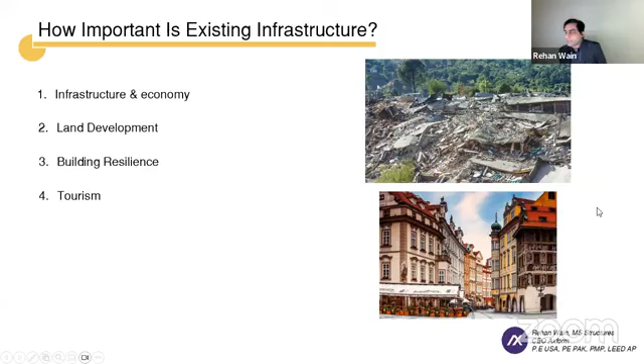What you can see is that we are living in very densely populated urban cities with all sorts of constructions. Some of them are code compliant, some are not. They're brick masonry, brick infill masonry structures, and there are some few minor cases of steel construction as well.

But we have a lot of buildings on our hand, and the best way to preserve our greenland is that we can repurpose and reuse, making sure we keep using the area that has already expanded instead of going more into greenfield. As you can see, the greenfield is decreasing every time. This is actually the top part of the city, but what has happened on the southern side is even much worse than this.

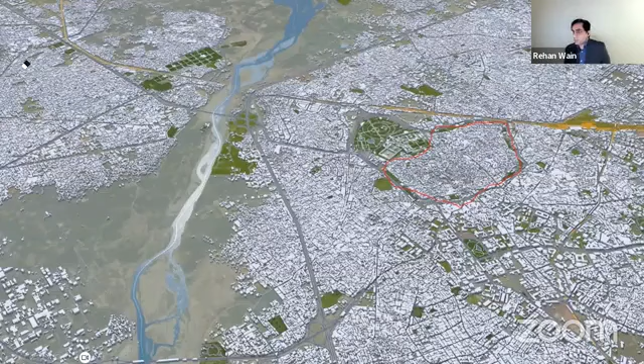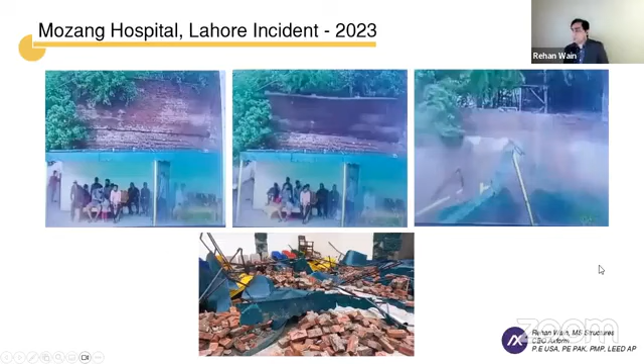I'd like to show you the next slide. If I can run this video.

Rehan, yes, please excuse me for a second. Yes, sure. I would like to welcome our new participant, Mr. Jovin Manyori, from Tanzania, East Africa. He has joined us for the first time. Thank you very much. And we have been joined by Mr. Zhang Jianling, a Chinese national. Thank you very much. Both are civil engineers. Thank you for your time and coming to this lecture. Thank you very much. Rehan, you can continue.

I'll go back to the incident we were talking about from the Mozang Hospital, where there was an out-of-plane failure of the brick wall over the waiting area. I'll try to play this video from YouTube, and you'll see what actually happened. I'll just pause here right now. You see people sitting here, you see this brick wall, and you'll see what happens. Let's see.

What you just saw is a very basic thing. It's unfortunate - it's not a mega structure, not a 3, 4, or 10-story building that needed to be analyzed. These kinds of failures could happen anywhere, and the basic problem behind this is that we sometimes do not have a refined understanding of how different members behave under different kinds of loads. This was an incident I wanted to show for the out-of-plane failure of brick walls.

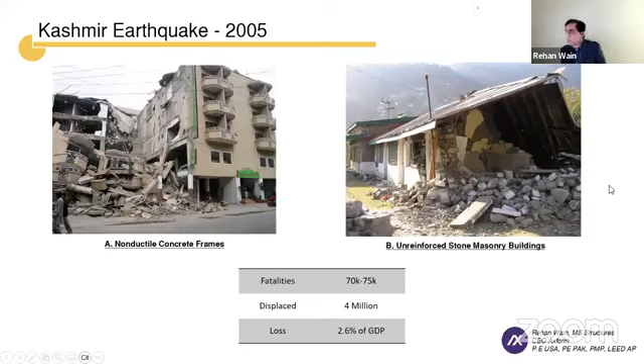So going on to the next slide, it shows images of what happens in non-ductile concrete frames. We know the philosophy of earthquake design for lateral force resisting systems is that we want our joints and columns to be ductile enough. We want hinges to form inside the beam, not in the column or the joints. We never want the joints to open up or fail, or the columns to behave as gravity columns, swaying like that. The hinge should form in the beams.

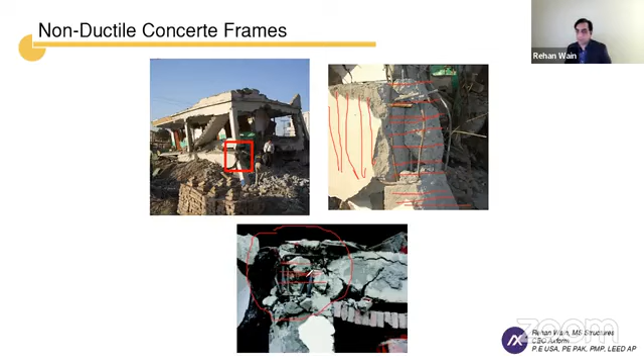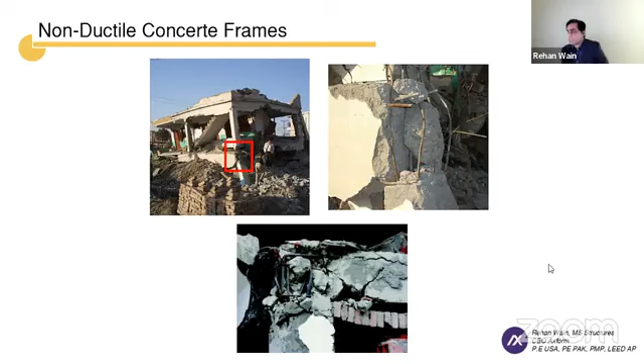What happens in soft story is that we have the ground floor, which is open because of retail or parking, but we have apartment buildings on top where there's not just the concrete frame but infill brick or something stiff enough bracing the frames. So you're introducing a weak region in the ground area - your entire energy dissipation happens there at the ground, but that's not what you wanted in your analysis. Unfortunately, the entire energy dissipation takes place at the ground floor. This is another case of non-ductile concrete frame failure.

So there was some kind of issue - I'm not exactly sure, but this story could have been soft compared to the stories above, or it had some torsion irregularity, or there was some strength reduction at this level. That's why the codes imply that you cannot have a sudden drop of strength or stiffness in adjacent stories, because it wants the structure to behave as one, and it does not want a majority of the energy dissipation happening in only certain stories.

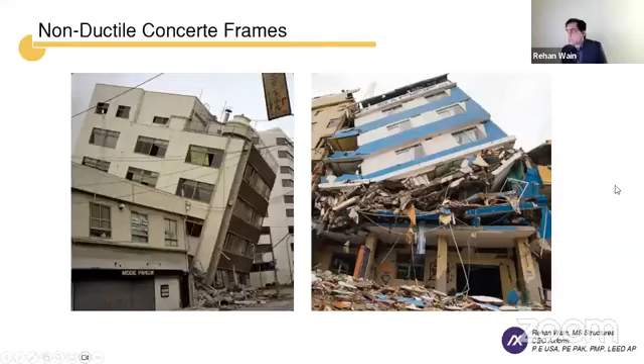So these were more examples of non-ductile concrete frame. Now we'll go on to the next slide, which explains the formation of plastic hinges in concrete frames.

We know that the basic function of a concrete moment frame is to provide stiffness through its beam-column joint. So if I draw a beam - sorry for the rough sketch - and this is your column, the majority of your stiffness needs to come from your joint. Your joint needs to be really stiff, right?

But what happens in case of hinge formation in the first case is your hinge forms either at the joint or inside the column, but it does not form in the beam. If I highlight this in blue as your beam, the hinge should have formed here in this region, inside the beam. But what's happening here is your hinges are occurring on your column.

So once the hinges are inside the column, there's a very rapid degradation of the story stiffness. And now you have a high second order effect as well.

What a high second order effect means is you have your story shear like this, your gravity loads were here like this. Now you have this huge displacement from your equilibrium position - you have this delta introduced here. And because you had a hinge form at the column, your entire structure is swaying too much, more than what you anticipated in your analysis.

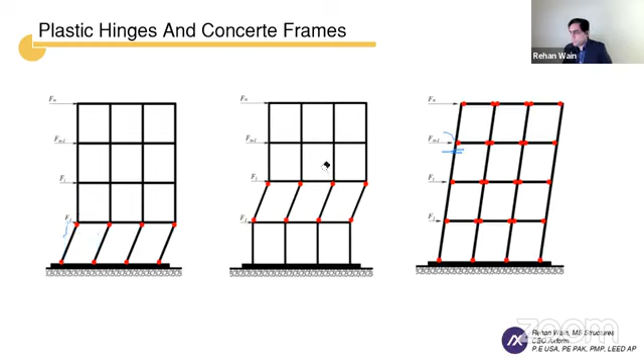So we talked about non-ductile concrete frames and plastic hinges in pretty good detail. Now let's talk about what happens in case of brick or stone masonry. This kind of construction is something you would typically not find in IBC or American codes, because the developed part of the world has transitioned away from the use of bricks or stones as partition walls or as bearing structures, especially in new buildings.

So a lot of the literature I found on how to resolve this is coming either from inside Pakistan or from our neighbors, India. The problem with stone or brick masonry is different - we don't have the same problems as in non-ductile concrete frames. It's a different animal, a different issue. For example, there was a wall here before - what happened is there was an out-of-plane seismic motion, into or out of the paper.

So what happened is the stone here just fell off. It's because the wall does not have the minimum capacity for out-of-plane action, and most of its shear strength is in the plane, in the direction of the wall.

Another issue is that we have these tall walls not braced along the height, and in fact, they're not even restrained at the top by a positive connection. Typically, you will see just a light gauge metal sheet placed on top with some wooden purlins or something like that.

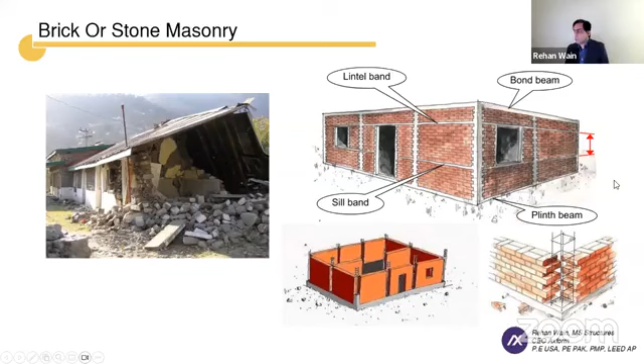ASCE 41 actually also has a ratio for the aspect ratio, shown here on the right. You cannot have a tall wall with small width - this wall would be the favorite for an earthquake to just topple off. So they want to limit your aspect ratio by introducing these sill beams or bond beams with columns around them for confinement. This is the solution for brick or stone masonry in regions with high hazard of out-of-plane failures.

Another very interesting thing I've found from the EERI paper is the Dhajji Dewari, if I'm pronouncing it right - a genius solution developed in the Kashmir Valley. You will not find this in the codes, but it's how they were able to resolve the out-of-plane failures in some regions where they have these wood-laced structures.

What they're doing is introducing wooden members to break the aspect ratio, breaking the entire wall into small panels. This also increases - it's doing the same function - confining the stones against out-of-plane failures.

The EERI paper came out in December 2005, the first one from them after the Kashmir earthquake, and it reported minimum casualties associated with this kind of structure. Although it wasn't explicitly designed, it's surprising how well it performed based on the solution the people of that region had learned over time.

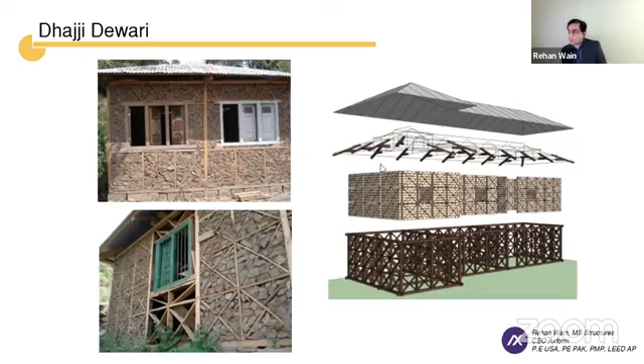I've seen a lot of testing for this structure. I found that it was tested later on in IITs and also in UET Peshawar by, I think, Dr. Qaisar Ali. What they found is that this structure has indeed shown much better performance in the labs as well, especially if you nail the wood together - instead of just placing it, connecting the wood with nails makes it behave in a much better way.

The next problem you'll see a lot in structures that performed poorly in earthquakes is a poor understanding of diaphragm action. Unfortunately, what typically happens is a structure has, say, a shear wall designed for some code-level forces, but there was no positive connection with the diaphragm. The connection was not strong enough, and it failed pretty early, so the forces from the diaphragm were not able to transfer to the walls as intended.

The dowels need to connect from the diaphragm into the wall, so that the shear generated because of seismic action is able to transfer into the wall. These collector reinforcements are typically there - the name implies they enable the diaphragm to collect the force, and the dowels are able to deliver the force to the vertical elements. This is a pretty detailed topic, and I don't have the liberty to go into depth, but this is the basic understanding of it.

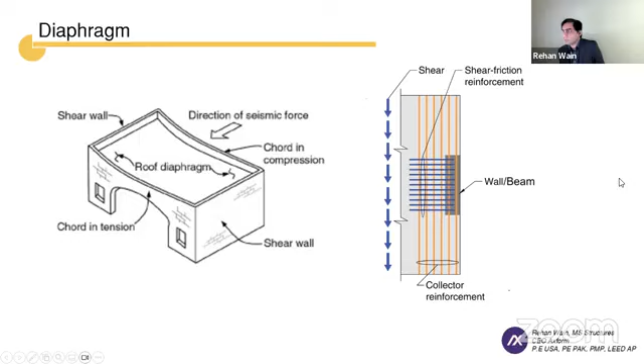So now we already talked about the problems, the importance of existing infrastructure, and some case studies. Now let's start on the evaluation or retrofit types in existing buildings.

In ASCE 41-17, I took three definitions, and the way there could be different needs for evaluating an existing building. The first need is mandatory - for example, there are structures with significant structural deficiencies, and the building department, with some authority in that jurisdiction, passes an ordinance that so-and-so buildings have been flagged because they have, for example, a soft story or other issues that need to be rectified. In that case, it's a mandatory evaluation - the owner is required to do that evaluation or retrofit because the city has passed an ordinance they need to comply with.

So this is the first type you will see in case of evaluations. The second is voluntary. What voluntary seismic evaluation or retrofit means is that the owner themselves wants to bring up the performance of their structure - because, for example, they talk to structural designers in the field who say that some earthquake might happen in the future, and they want to improve performance to make sure their building can behave well when the hazard sets in. In that case, we classify it as a voluntary seismic evaluation.

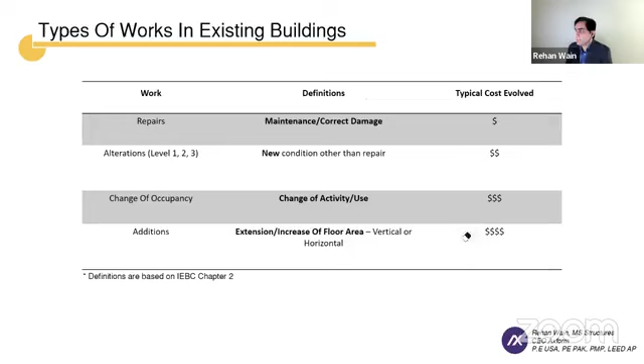The last one, addition, is typically the most expensive, because when you are doing additions, you're typically adding quite a lot of load on your structure. So this summarizes the types of work.

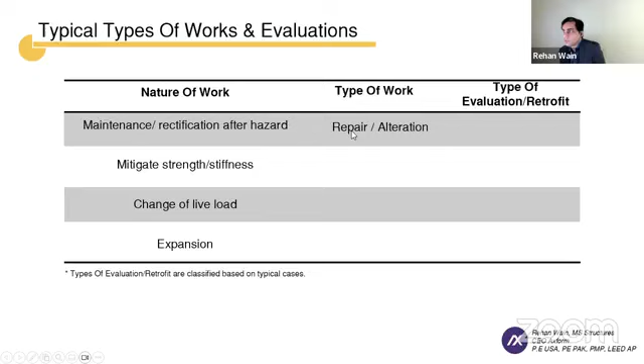Jumping to the next slide, I want to quickly go over and summarize what we talked about. For example, there's maintenance or rectification work happening after a hazard—some hazard you're rectifying. The type of work is going to be typically repair, but it could be an alteration as well if there's some major change you need to do after the hazard. And the type of evaluation would be mandatory.

For example, the earthquake hit a certain region and the building is in pretty bad shape, so the building department would instruct you to fix your building and bring it up to a certain safety level—it's mandatory in that case. If you're mitigating some strength or stiffness issues, that's an alteration you're doing, and again it could be mandatory or voluntary. If it's coming from the building department it's mandatory; if the owner is doing it himself, it's voluntary.

If it's a change in the live load, it's an occupancy change, in code language, and it's triggering—it would typically trigger the evaluation because of the increased loads.

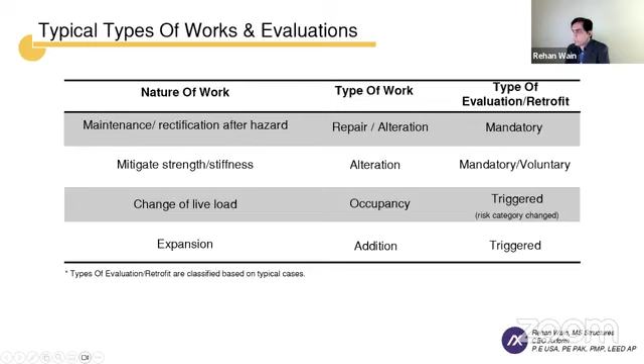The last type is expansion. Expansion means it's an addition, which would typically trigger checking the entire building for seismic, and you need to at least check the members that have increased gravity loads for gravity. But for seismic, you would typically have to check the entire building in case of a major increase in seismic mass. So this is like a building I wanted to show.

So what happened is they had these 2 stories which were already there since 1922. They made 5 stories above it, 3 full stories, and 2 partial stories above.

This kind of condition basically means you have increased loads on your building, so you need to check the building below for the increased gravity loads. We also have an increased mass now sitting on top of our existing building, so we need to ensure it's not just the increased dead and gravity loads, but also the increased mass and how that force needs to transfer out at the connection points. That's typically very important in existing buildings where you have new mass on top, and you need to make sure it transfers out right and is delivered to the foundation.

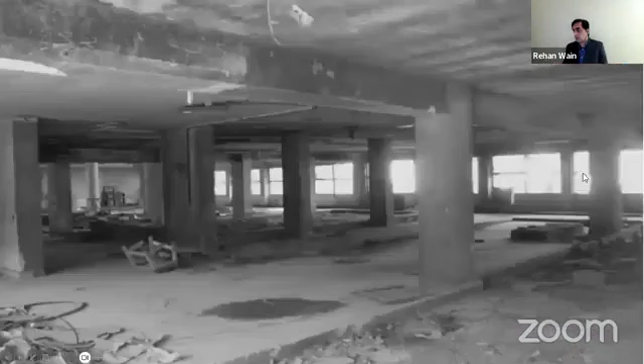I think it's pretty straightforward, so let's go to the next example. There's a building, for example, and now the owner wants to repurpose it. You will see all the architectural cladding, the ceiling, and floor finishes come off, and there will also be a change of doors and windows. This could be a major alteration, or this could even be an occupancy change, depending on whether they are changing the intent of the usage.

When something like this happens, it triggers the requirement to check the members for increased loads, if that's the case, and check the members for increased seismic loads, if that's the case. But if you're decreasing the loads, you are not triggering the need to check.

This is the interesting part of the existing building code: it wants the owner to keep using the building. It doesn't want to penalize you just because you own a building that's 30 years old. That's why it gives relaxation so you can keep using it, but you need to meet a certain level of minimum safety.

So let's now talk about the challenges associated with existing buildings, especially retrofit works. The first thing is there needs to be feasibility of the retrofit work. The retrofit cannot be more expensive than new construction. If you are retrofitting a building that's 6 or 7 stories high and the proposed retrofit surpasses the cost of new construction, it typically doesn't even make sense, because the owner can just make a new building instead. So the retrofit cost needs to make sense in comparison to new construction.

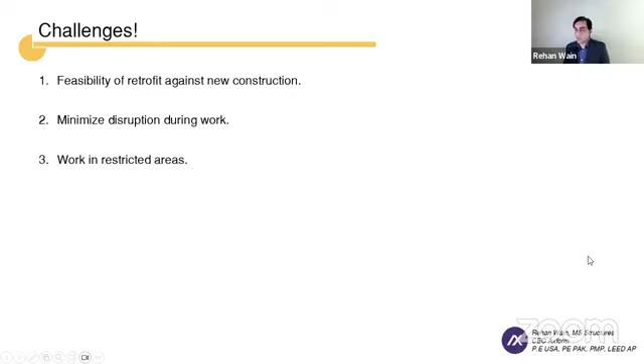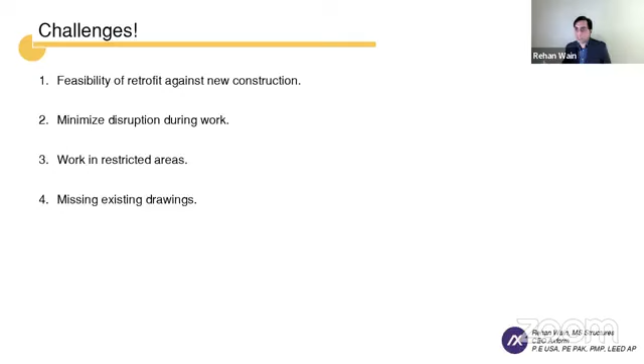The fourth challenge is that you could be missing the drawings entirely for the existing building. If you are analyzing a structure and don't have existing drawings, you basically need to establish the drawings first, establish the as-builts.

The fifth challenge is that when you're working with historic buildings, we need to maintain the character of the existing building, and this is also addressed in the existing building code. We typically cannot change the facade, and we typically cannot change features that are associated with its historic character.

So we need to bring the performance up, but we also need to make sure that it does not change the overall look or the character of the building.

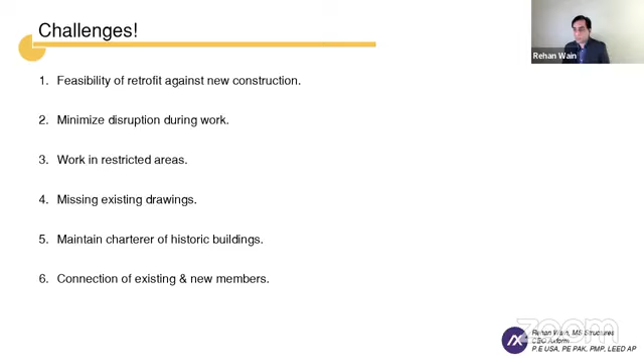And the last major challenge associated with existing buildings is how we connect the existing and the new members. In new construction, especially in case of concrete, the joints are monolithic - you cast the concrete around the joint at once. But when doing additional work, expanding an existing structure, you would have to use drill and epoxy anchors, expansion anchors, or some other solutions to connect the existing and the new members. So this is also one of the challenges of working with existing infrastructure.

But in case of existing building codes, they had this problem: they developed a lot of infrastructure that was already standing there. The challenge was how to encourage owners to keep reusing it. You don't want to penalize owners because they have a building that's 50 years old and now need to bring it up to the new code, and if they cannot, then they cannot use it. Because if they started doing this, the cost of the retrofit would not justify itself, and it would discourage the reuse of buildings.

So I would break it down to the code provisions between pre-97. Pre-97, the trigger was correlated to the cost of renovation. So if an owner had a building and was doing renovation which was deemed to cost approximately 50% or more, they would say the building needs to comply with current code. That was a huge penalty on the owner, because if you're renovating your building, or selling it to someone else who wants to reuse it for another purpose, they would have to bring it up to the new code - spending a lot not just on renovation but also on retrofit works. That changed in UBC 97, which abandoned the concept that spending so much means you need to bring it up to the new code. But what UBC 97 did is...

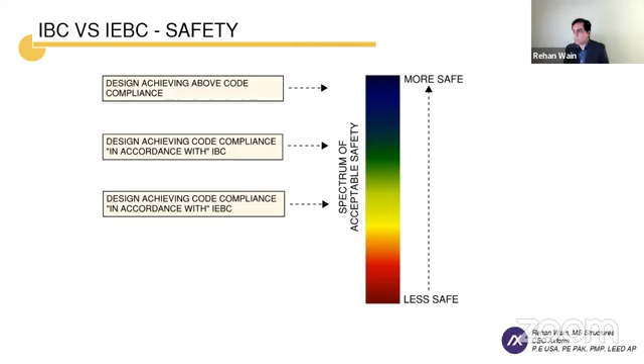These snaps are taken directly from the building codes. On top you see a snap from the IBC, and below you see the IEBC, the existing building code — both from chapter 1. IBC says: establish minimum requirements to provide a reasonable level of safety. But IEBC says: provide flexibility to permit the use of alternative approaches. So IEBC is actually not structured the same way as IBC.

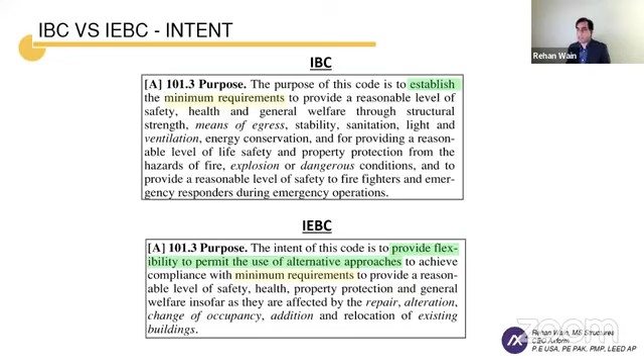If you open the existing building code, you'd see that it's structured based upon the nature of the work you're doing. If you're doing repairs, you just need to check this and this, and you're good enough. If you're doing alteration, depending on the nature of the alteration, you need to check this and this, and you're good. So IEBC provides flexibility — it has the prescriptive-based approach, the performance-based approach, and also the work area-based approach. There are several approaches covering different natures of work.

This is another snap from the codes, directly from the existing building codes, showing two analysis approaches. On the left side it says you need to comply with the full seismic forces, and on the right side it says voluntary alterations. So if I label this column as 1 and this column as 2 — if you're doing something very serious to the building, there's a risk category change, you're upgrading the risk category, you're increasing the loads too much, then you need to comply with the full seismic forces.

IEBC would tell you to do ASCE 41 Tier 3, which is a full building analysis, or it still gives you an opportunity to use the IEBC and ASCE 7. That's pretty interesting - the reason they still have this clause is that the usage of IEBC or existing building code is still not very well understood across the industry, even in the United States, and even lesser for building officials. So they still want to give you the liberty that if you could justify the current code application over the new code on the existing building, then it's still good enough. But engineers who do understand the existing building code would typically use ASCE 41 Tier 3, because it gives you more advantages of reusing the frame members, which otherwise would not even fall under intermediate or special moment frames.

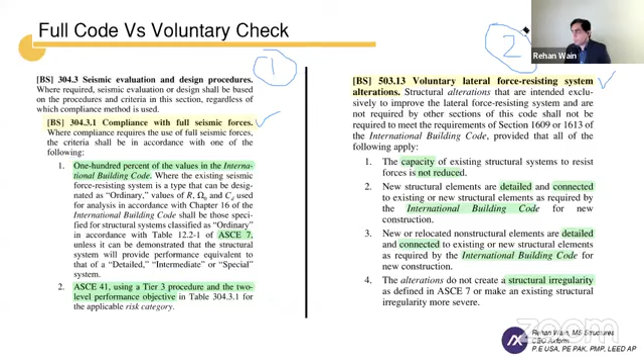So what the next slide does is basically give you a one-to-one comparison of the basic differences between ASCE 7 and ASCE 41. Now we're moving into the analysis and the loads.

So ASCE 7 is basically a prescriptive-based design. It does not give you the liberty to design for several performance levels - it has one performance level, basically where you're designing for your design-based earthquake, and that's life safety. So you have the loads that you compute, and based upon the loads you get your demands - shear demands, moments, torsions - and you're checking for certain serviceability checks for the deflections or story drifts, and you compare it against the allowable limits inside ASCE 7. If you're complying with that, then your design is deemed to perform okay.

But ASCE 41 does not have the prescriptive-based design, even in the linear approaches - you can use performance-based design even with linear approaches. The theory behind performance-based design is that you design to certain acceptable damage levels. You select your hazard - you're given some options to select from - then you have your allowable damage that you can design to, and the composite of that gives you the performance matrix. But you can even adopt linear approaches to work with that in the case of ASCE 41.

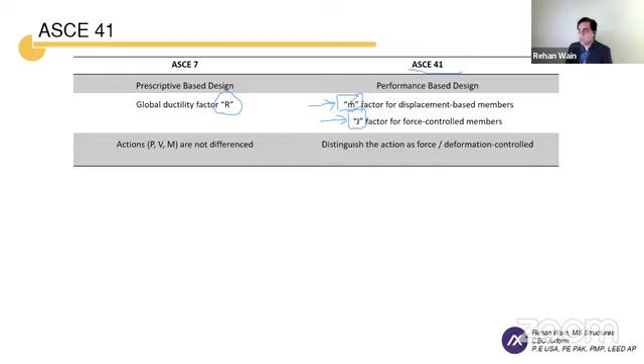And they have a J factor to account for the members that are intended to remain elastic. So you have, for example, columns that support a discontinuous shear wall, or a member that you do not want to show too much inelastic behavior. So you would not use an M factor on it, you would use a J factor on it.

I don't have the liberty to go in detail, but my basic point is that there are no R factors inside ASCE 41. You would see M factors and J factors there.

Another thing about ASCE 7 is, because it's a prescriptive-based approach, it handles all the actions for axial, shear, and moment the same way. You get your demands, you compare against the capacity, so the structure is deemed to behave okay.

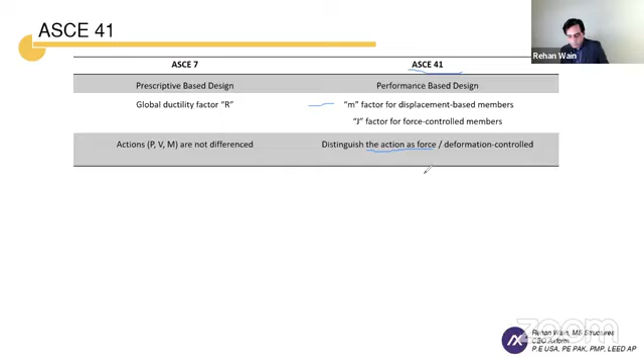But if you go in ASCE 41, it classifies even the actions differently. It says your shear is more important than your flexure. So your member should not show too much inelasticity in case of a shear action, but your member should show flexure hinging. So if you want your member to show flexure hinging, it's important that you have enough shear reinforcement so the member does not just shear away before the flexure hinging could even occur.

So ASCE 41 first breaks it down to the member components, and then it even further breaks it down to the action and components. It handles even the components separately.

This is a very simplified and very quick way of understanding what performance-based approach is: you have a ground motion that you select based upon a probability of exceedance in certain years, and then you have a performance level, which means the maximum acceptable damage that you are willing to take after a major event hits.

So when this event hits, or an event equivalent to this, it's just a mathematical model, but when an event equivalent to this hits, I am okay - like the owner says, I'm okay to have my structure damaged approximately till here. So when you select this and this, it becomes a performance matrix.

And the way the code gives you the performance matrix is based upon risk categories. So if a structure is more important, for example a hospital, a fire station, or school buildings which should stay operational, or there's a major life hazard involved, then your performance matrix would give you strict criteria for that, and it would be much more relaxed in case of buildings that are not that critical.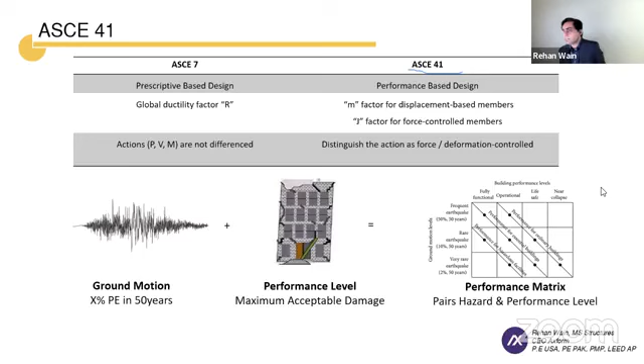So moving on to the next slide, it shows you the response spectra plot. I just took these values from the USGS tool online, and I plotted it for different hazards that are basically available inside 41 for the downtown area of LA City.

So in ASCE 41, as you can see where my cursor is right now, we have 4 kinds of hazard: BSE 2N, BSE 1N, BSE 2E, and BSE 1E. So we have 4 different kinds of hazards in ASCE 41. That's another difference from ASCE 7, where we just have one response spectra to work with.

And BSE 2N is actually here, the red one on top. You can see this is equivalent to MCER, maximum considered earthquake with a risk of 1%. And when you take 2/3 of it, you come here to the blue line, which is BSE 1N. So this is 1N, and on top is 2N.

And 1N is just like 2/3, which is equivalent to a design level earthquake that we use in the new code - basically it's equivalent to that. And BSE 1E and 2E, basically it's this yellow here and this green here. So the green is 1E and the yellow is 2E.

So like I said, the existing building code understands that you don't need the same safety levels every time. So they introduce these new seismic hazards, which are actually 75% of the hazards used for the new code. So you have BSE 2N, let's say this is 2.4, let's say, right, on the top.

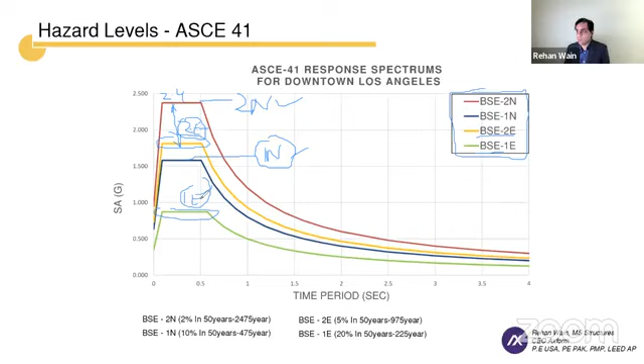Just to put it crudely, the way they establish BSE 2E is that it drops down to just 75% of the hazard. So you might not have to use the higher hazards for your existing buildings—you might be okay using BSE 2E and 1E. But it really depends on the nature of the work, like how much you're triggering the building or making it worse. There are 4 kinds of hazards given by ASCE 41.

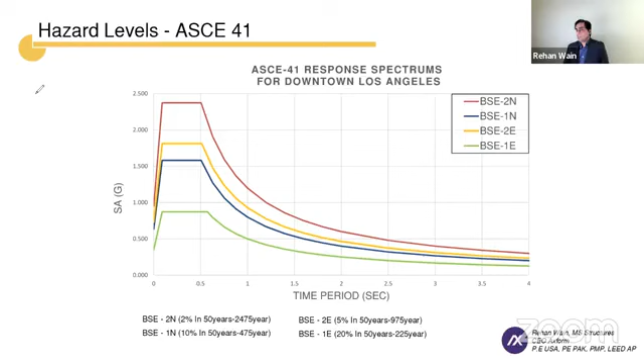Now let's talk about the next slide, which basically summarizes the last two slides we were discussing, the hazards and the performances. What you see on the bottom right are the performance levels.

If the owner wants that right after a major earthquake hits their building stays operational, that's a very strict criteria—this is the operational level. Immediate occupancy means there are some minor non-structural damages but almost no structural damages. Life safety performance level means there have been substantial structural damages and even more non-structural damages, but no life safety hazards.

This is what ASCE 7 actually designs for—life safety. It's embedded inside the code. It doesn't say it explicitly, but that's what's embedded inside ASCE 7.

Collapse prevention means the building skeleton is just barely standing—it hasn't collapsed, but pretty much everything else has happened, even non-structural components have failed. So these are the 4 performance levels we have as options.

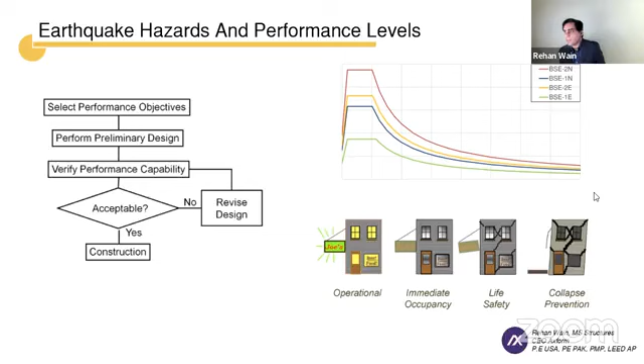This next slide quickly addresses the question of why. If immediate occupancy is the best approach—meaning a major earthquake hits and you have the least damage—while collapse prevention or life safety means you have the most damage, the question becomes: why don't we just pick immediate occupancy for everything?

The answer is you cannot, because it would be so uneconomical to design for such a stringent, tight approach. It's not an option. That's why even ASCE 7 designs for the life safety approach.

But what's the benefit? For example, say there's a commercial building that's 10 to 12 stories, and the client has a lot of money to spend, and they say they don't want their building to be unoperational even for 30 days after the earthquake. So they'd ask the structural designer to go above code and design for a performance level even better than what the code requires.

So what would happen is they'd have minimum replacement work—if you pick a better performance level, your replacement work would be even less, your chances of any deaths would be lower, and your downtime means your building can come into operation right after the earthquake, or a few days after. This is the basic theory behind the performance-based approach—it gives you the liberty to choose from different options.

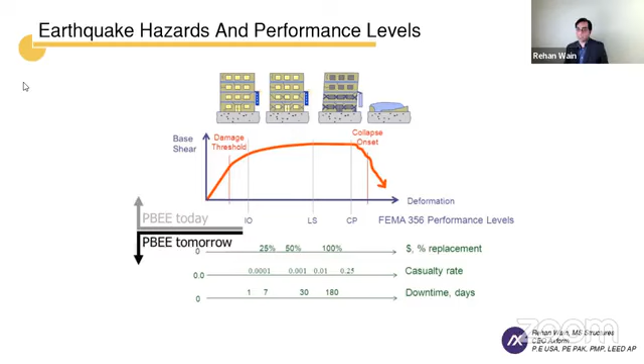The next slide shows two performance matrices inside the existing building code. On the left side, if you were doing full seismic forces—which I talked about a few slides back—in case you're doing major alterations or major changes to the building, you need to pick this matrix.

When you come into this matrix, you'll see, unfortunately I'd say, BSE 1N and 2N. You have much higher hazards if you fall into this matrix because of the nature of what you're doing.

But if you're not making your building worse and there are some minor alterations or alterations happening inside the building, then you can use the matrix on the right-hand side, which is the equivalent to BPOE inside ASCE 41 — you see BSE 1E here and 2E. These are reduced hazards, not the same hazards used by the new code. So under the matrix, if you have a change of occupancy or additions happening, you need to comply with the matrix in the first column. But if you have alterations, typically you'd fall under the second matrix, which has reduced hazards.

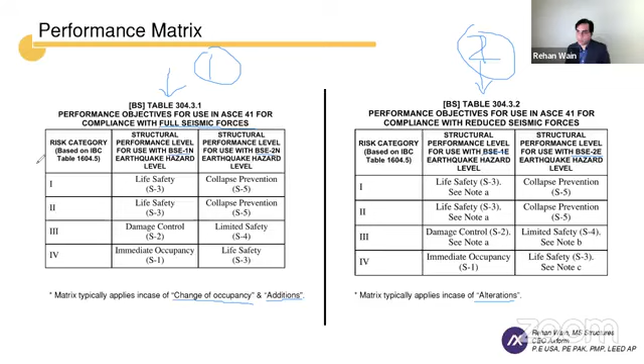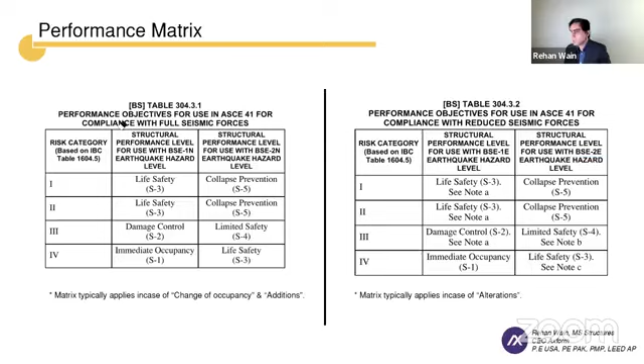So let's now see how ASCE 41 classifies the elements. You have a building — beam, column, slabs, diaphragms, shear walls — let's see how ASCE 41 classifies those. The first approach in ASCE 41 is classifying members as primary and secondary. A primary member is the one supposed to resist seismic forces primarily — your shear wall, moment frame, or any member supporting a discontinuous shear wall or discontinuous moment frame. Although discontinuity is not preferred, sometimes you might have it.

The members that are gravity members are shown in blue here, so they are classified as secondary. ASCE 41 does not have the same criteria for secondary and primary members — the primary member needs to be checked against much stricter criteria, because those are the members taking the seismic forces.

The concept for gravity beams and gravity columns is that they need enough capacity to accommodate the deformations, because gravity beams and columns will still see some seismic forces since the building sways. That's why over time, in ACI 318-19, when you have SMF or a high ductile frame structure, the code will still point to a very strict criteria even for your gravity columns — because they understand those columns also have to undergo sufficient deformations due to deformation compatibility.

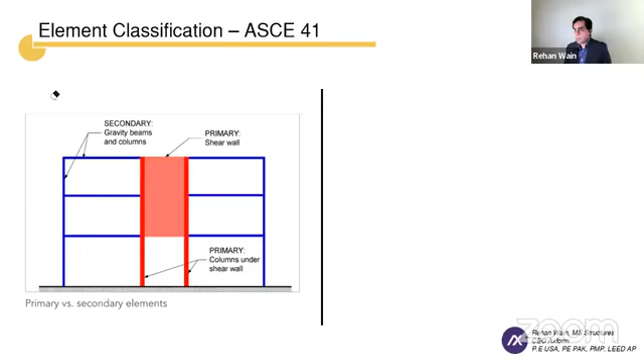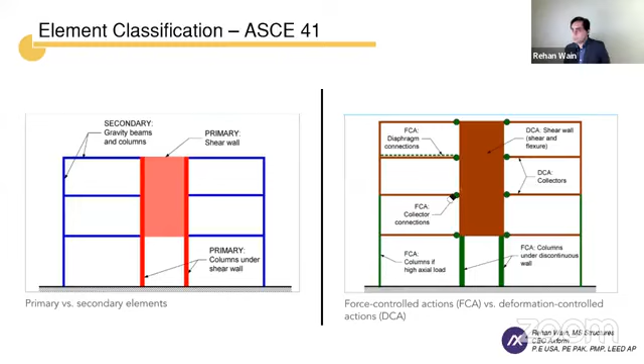We saw the pictures at the start of the talk — joints opening up with energy dissipation concentrated at the joint. That's not what ASCE 41 wants. It would tell you to design the connections and any columns supporting a discontinuous wall for much higher forces, so these members show little to no inelastic behavior. You want deformations concentrated in the members that are reliable for inelastic behavior.

ASCE 41 has different approaches to analysis — I'll go fast since I'm running out of time — but there are three approaches: tier 1, tier 2, and tier 3. The first is a screening-based checklist: you have a building, different building types, and a checklist based on prior knowledge, like knowing concrete frame buildings with infill bricks show certain deficiencies. So the first way is just checking through the checklist.

If the checklist shows some non-compliance, tier 2 helps you rectify that deficiency. Tier 3 is the full building analysis where you model the entire building in ETABS and check all the members. But it's important to understand that using ASCE 41 for an existing building doesn't mean you have to model it in software every single time and check everything — that's not the intent every time. You might be required to, but not always.

So what's the line of action before starting an analysis? When you start an analysis, the first thing you need is to gather all the relevant documents. You need to get the existing drawings, the geotechnical reports. These are important before starting analysis.

Then you need to establish the history of the construction and modifications, if any. When you're analyzing an existing building, if you're just sitting at the computer and start modeling it and run the analysis saying it's okay or not okay, it doesn't have meaning unless we know the history of construction and modifications that have happened over time.

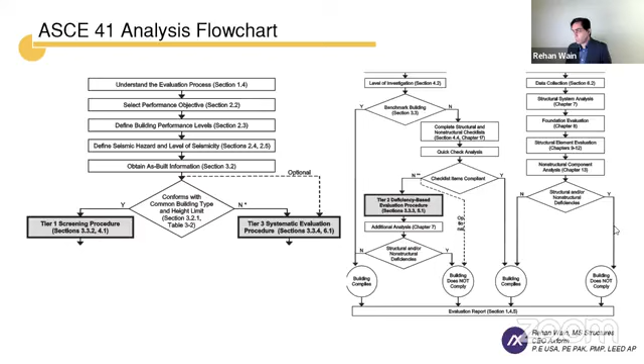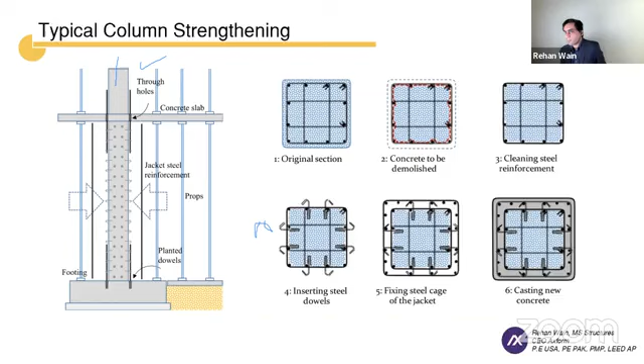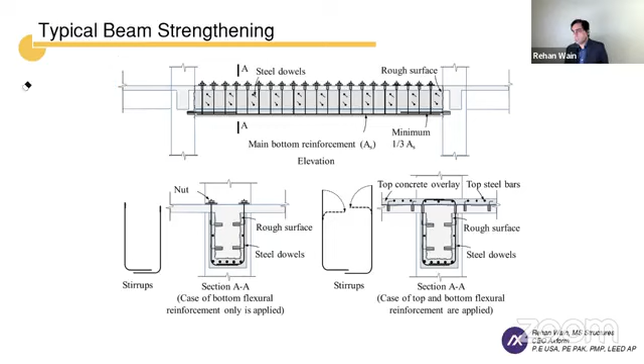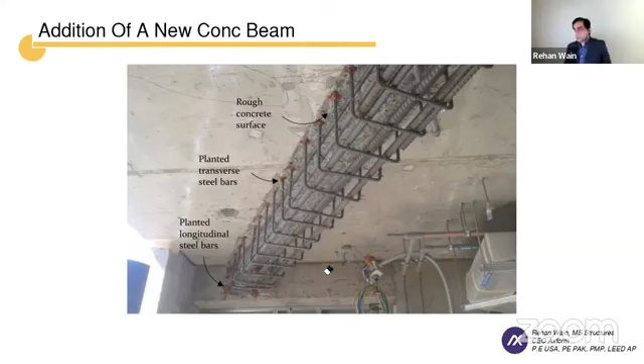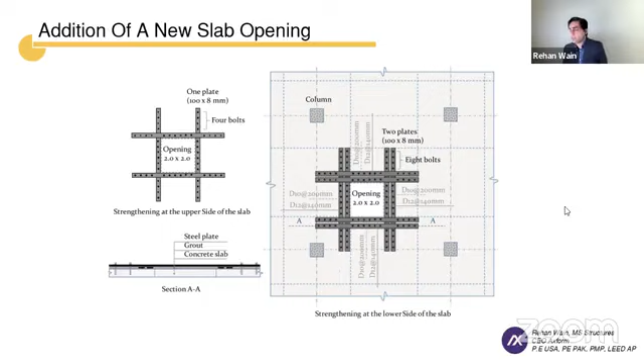With this, I would like to end my presentation and thank the Society of Civil Engineers. I would like to thank Tahir Saab especially for giving me an opportunity to present here. I'd like to thank all my seniors and Rizwan Saab especially for inspiring me to give this talk. I end my talk with a quotation: words may inspire, but at the end of the day, it's the actions that we do that create the change. Thank you.